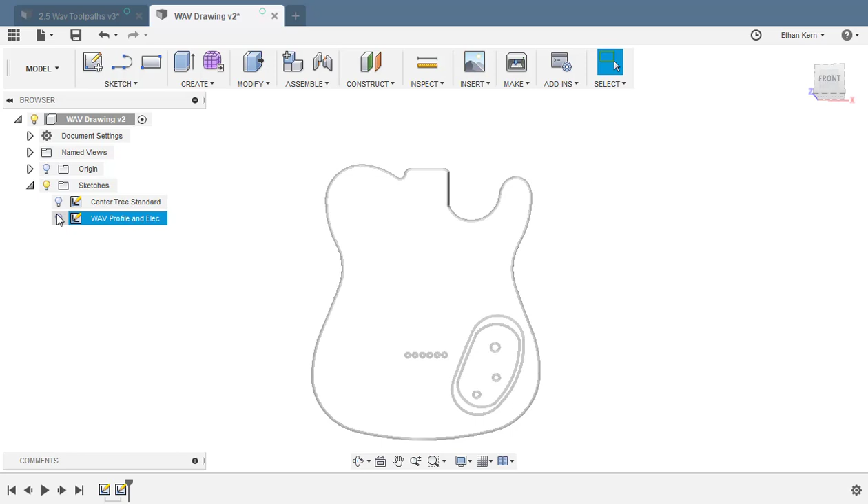I'm Ethan Kern, and in this video today I'm going to be showing you the steps that I take to create toolpaths for an electric guitar in Fusion 360. One of the first things that we need to start off with is the sketch. This is the center tree here, and it has all the critical dimensions and locations for all the pockets and drills. The next part is the profile and the electronics pocket here.

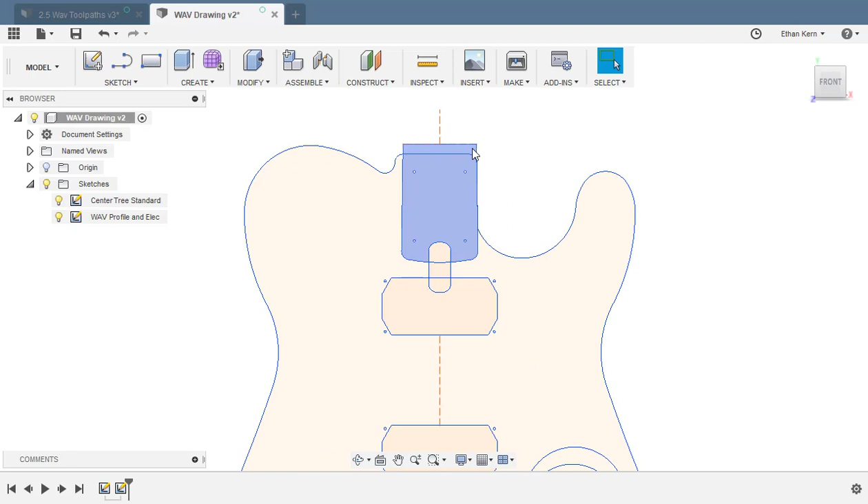There's a few things to note and a few modifications that can be made to these sketches that will allow for simpler toolpaths and a better finished product. The first being that this top edge of the neck pocket right here extend past the top of your profile by more than at least half the diameter of your cutting tool.

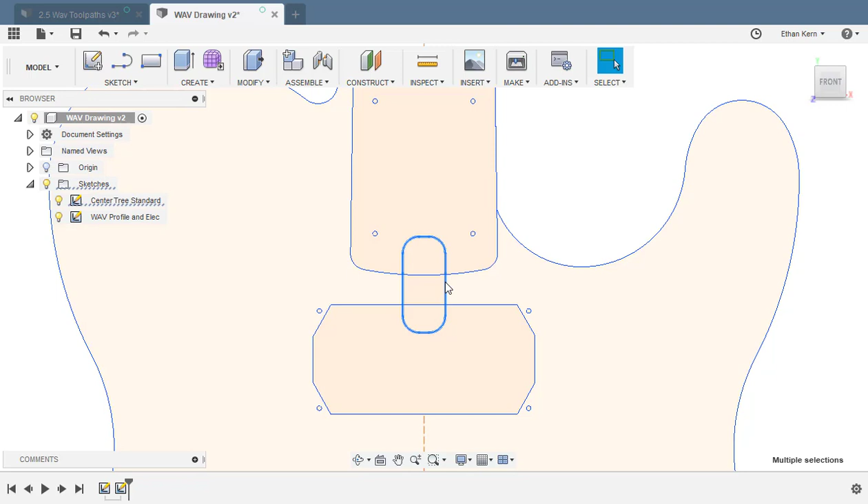The second is this access to the truss rod. By making this feature its own separate chain, we can create a single toolpath that will efficiently and effectively remove that material. The next feature we'll be focusing on is this electronics cavity.

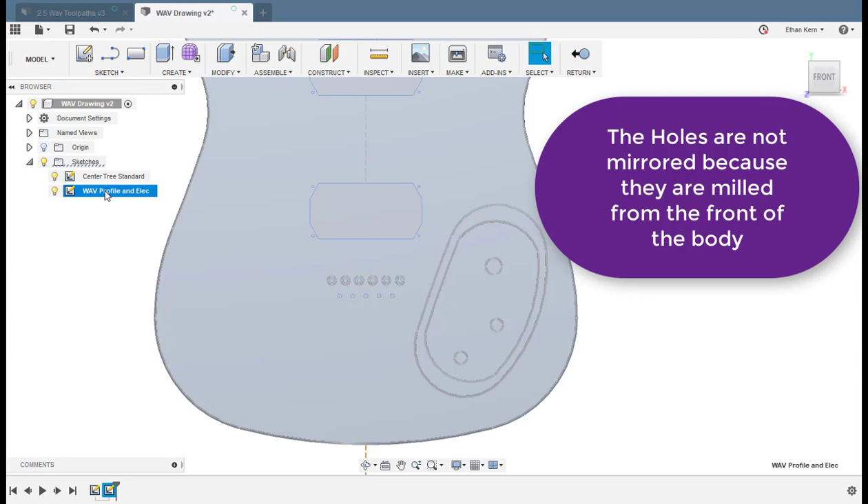These three holes are for the three-way switch and potentiometers, and then on the back is a pocket that will be machined for electronics, whereas this outside profile will be a shallow lip that will be used to hold the electronics cover. One thing we need to do to prepare this sketch is to mirror those two profiles along the center line of the guitar. And then we'll delete the original.

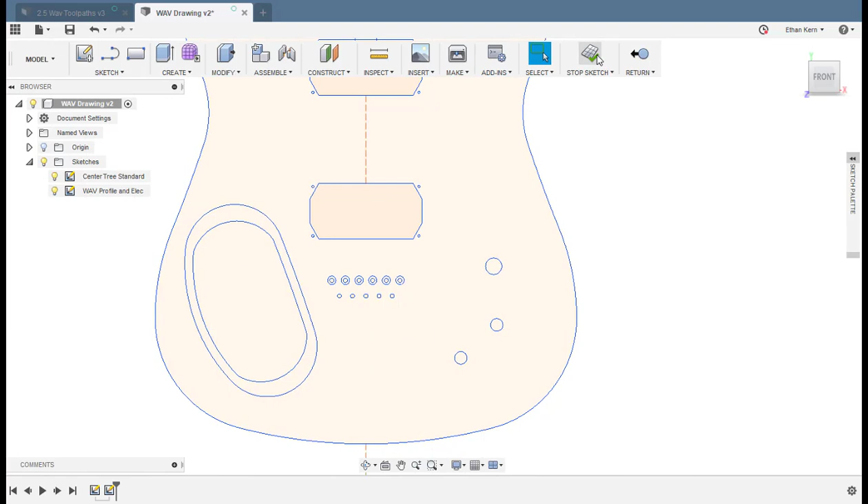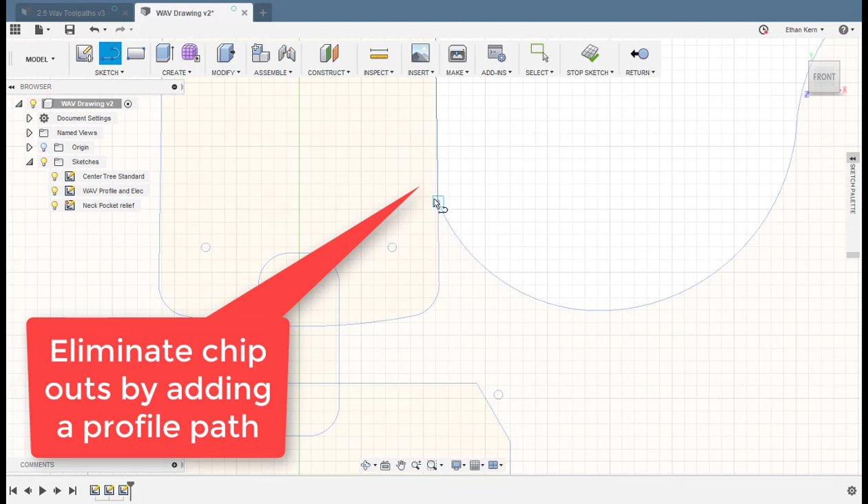We're going to exit this sketch and create a new sketch called Neck Pocket Relief. The purpose of this sketch is to add a few lines that toolpaths will be derived from. Creating these toolpaths will create a break when the profile is machined. This will greatly reduce the amount of chip out that occurs on that sharp point. Go perpendicular to the point where the profile meets the neck pocket, and then just at an angle, making sure not to touch the profile.

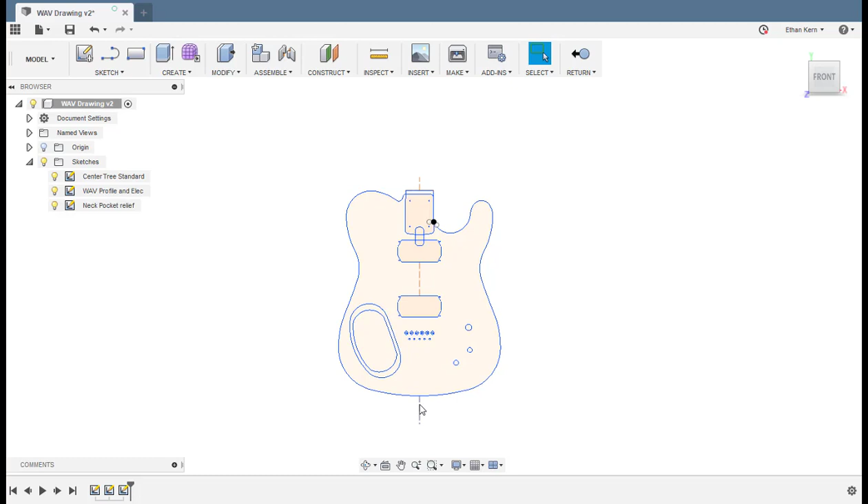Just to recap what we've done in preparing this sketch, we've made sure that the neck pocket has extended past the top of the profile. We've ensured that the truss rod access is its separate entity. We've added a relief for the neck pocket, and we've mirrored the back plate around the center line.

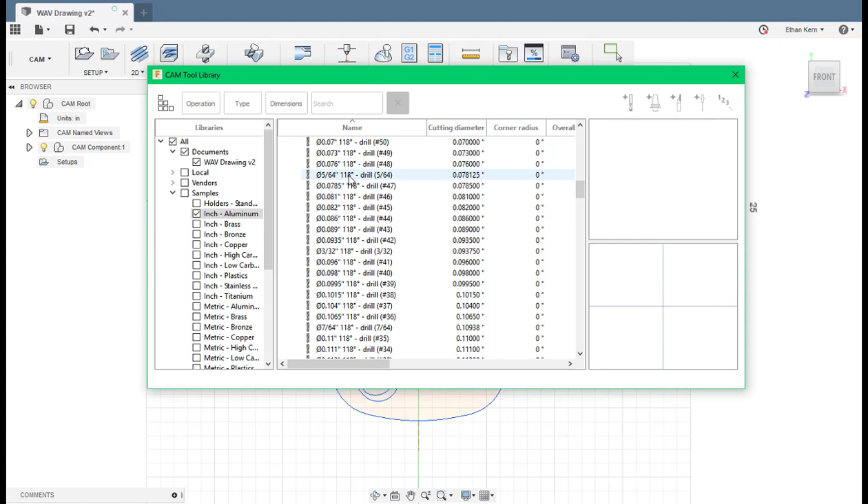We'll now begin adding tools to our library. I found that for most purposes, the sample inch aluminum feeds and speeds work very well for starting out. To add tools, we simply find the tools that we'll be using, and then click and drag, and then insert them into our drawing. We've got a 5/64 drill bit, a 3/16 drill bit. We'll be using a 1/4 inch drill, a 1/4 inch flat end mill, and also a 1/2 inch flat end mill.

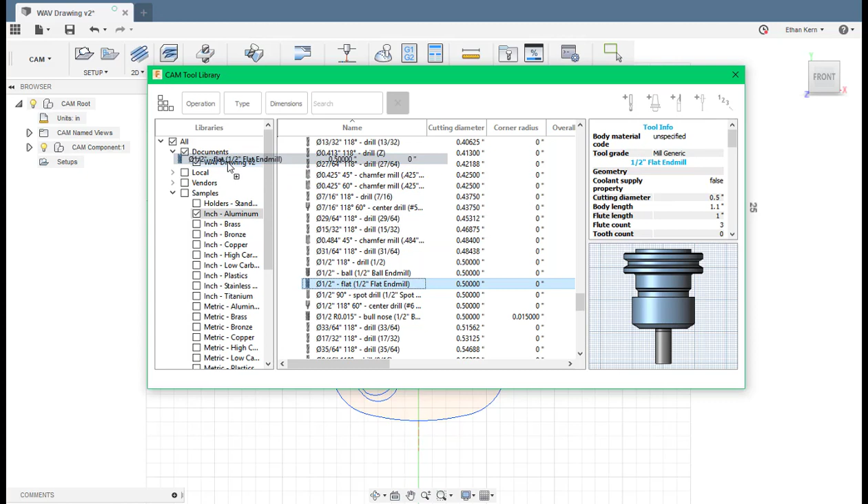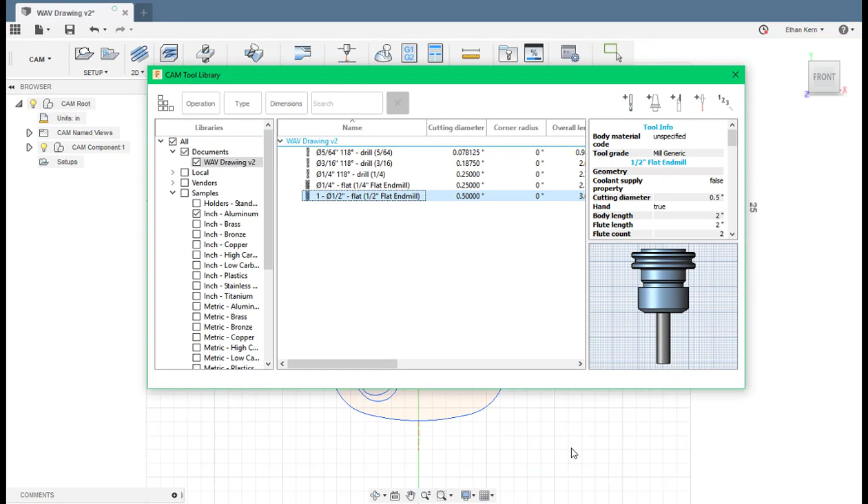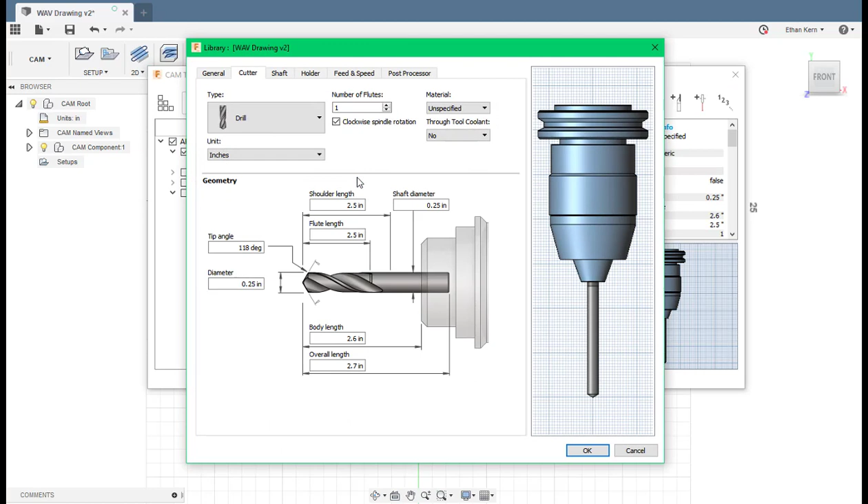We've got our tools selected. Now we're going to edit them to make sure they match the physical tools we'll be using. The flutes on this are too short, so we'll need to lengthen them to make sure that they cut deep enough. If you're using a tool changer, you're also going to want to make sure that you number the tools in accordance to where they are in the tool changer. We want to go through all the tools and make sure that they're all set up correctly. The drill bits are pretty standard. We just want to make sure that we have them numbered for our tool changer.

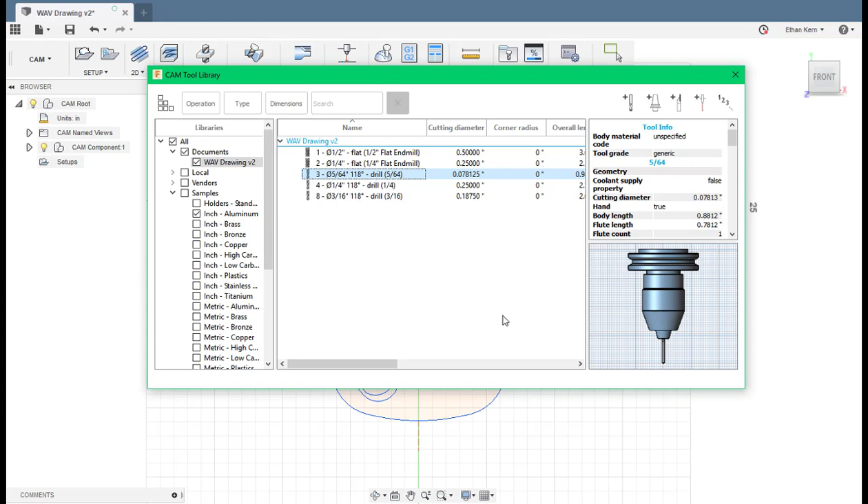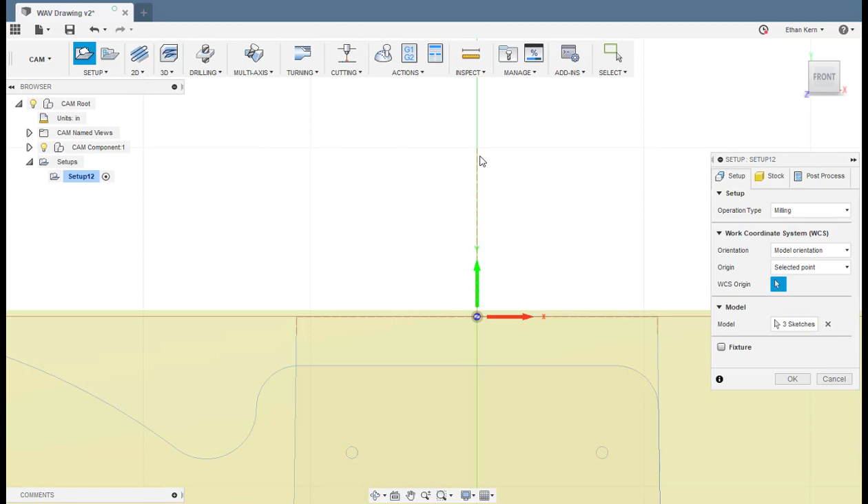With the tooling finished, we'll now create setups for the front and the back. We'll be placing the origin at the selected point. This will be the X and the Y axis 0 on your machine. Wherever you place this point in the drawing will determine where you need to zero your machine before you set up and run bodies.

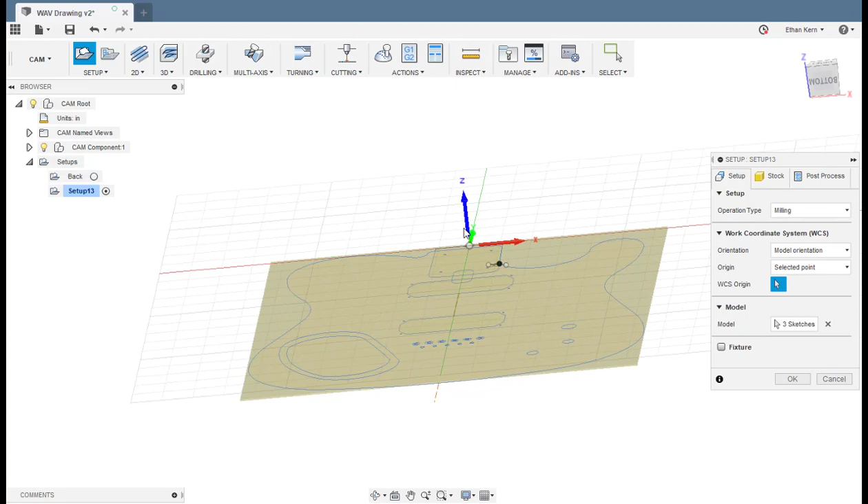We'll label this setup back and create another one for the front. We want to ensure that the selected point is at the same spot in both setups. This will be critical to the alignment when you flip the body. We'll label this setup front. Now we're going to activate the back setup and create a new folder for each tool that we're going to use on the back side.

The first one we'll label 250 drill. We'll create a new folder and then label this one 500 end mill. We'll click to activate the front and create folders for each of the tools in there. The first one being the 500 end mill. The next folder we'll create will be a 078 drill.

We'll have a 1/4 inch end mill next. And finally, we'll have a 188 drill. These folders will help keep the toolpaths organized within each setup.

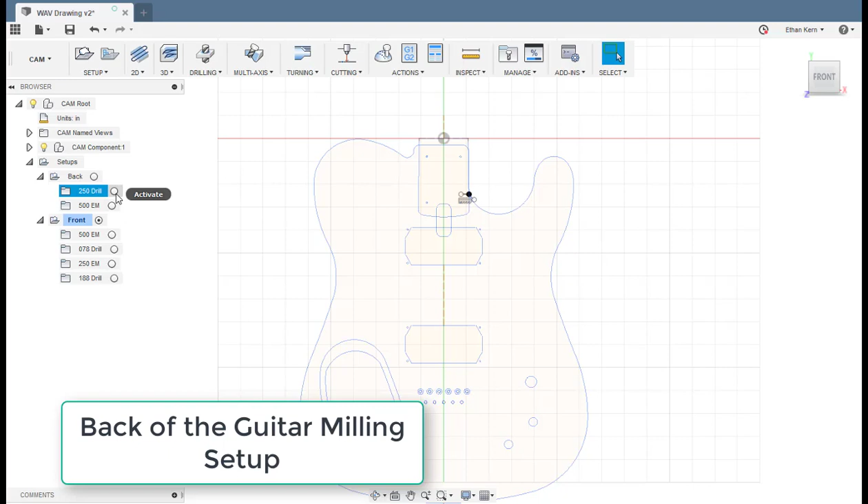We'll now activate the 1/4 inch drill folder and create a drilling toolpath. We'll select the tool and that'll pop up our tool library. We'll select the drill that we've already edited. In the geometry tab, under hole mode, we'll go to selected points and select the centers of our ferrule hole sketch.

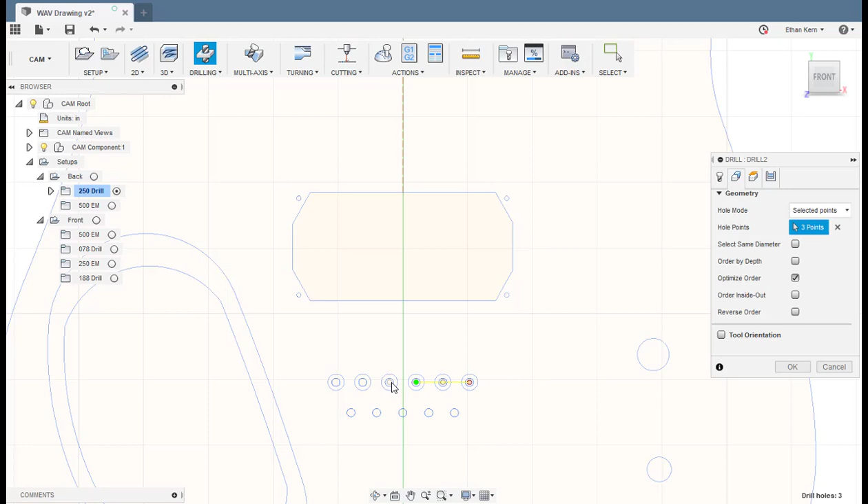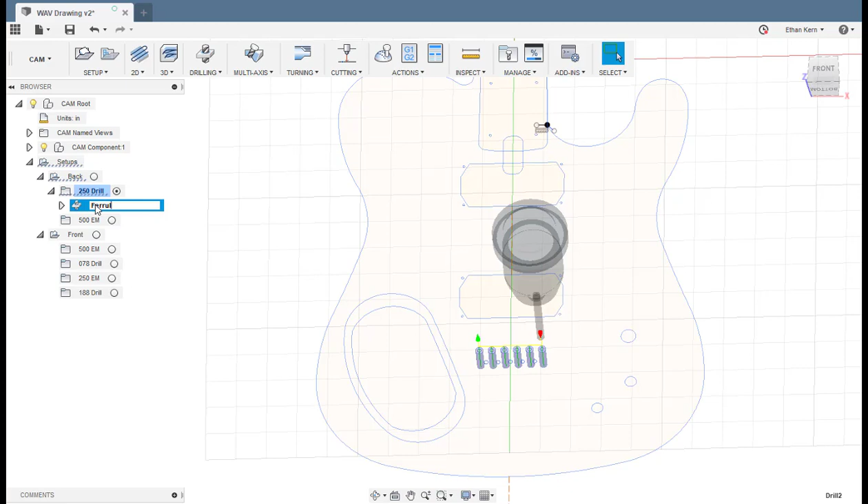From there, we'll set the height. The bottom height should be -1 inch, as that's the depth of our drills. When we hit OK, it'll calculate that toolpath and we'll be able to see the 1/4 inch holes. We'll label this as ferrule holes and then move on to the 1/2 inch end mill.

For this tool, we're going to be using a 2D pocket. Again, we'll select our tool and that'll pop up the library. We need to select the geometry, and we're going to be doing the outside lip first. We want to make sure that the arrow is pointing inward, and the part that's shaded is what will be cut. And this will go to a depth of 0.125.

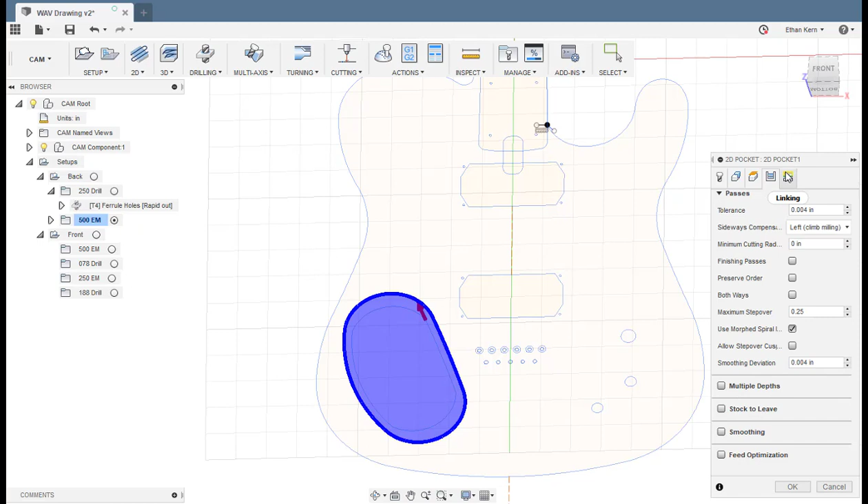We want to change the step over to about half the diameter of the tool, so since this is a 1/2 inch bit, we'll go to 1/4 inch, and we want to select use morphed spiral, and we don't want to leave any stock. When we hit OK, you can see the toolpath pop up, and we'll label it as electronic lip.

We'll now create the toolpaths for the electronics pocket. Again, we're going to select 2D pocket. Our 1/2 inch end mill is already in there with all of our feeds and speeds. We're going to go to geometry and select the internal for the pocket this time. We're shaded on the inside, so that's a good sign. We'll go to heights here, and the depth of this pocket will be -1.55 inches.

Under the passes tab, we want to change our step over to half the tool diameter again, 0.25. We're going to use the morph spiral. We don't want to leave any stock. And this time, since we're going pretty deep, we're going to use the multiple depths tab. For the step down, I'm going to set to 0.375, and I would like to use even step downs.

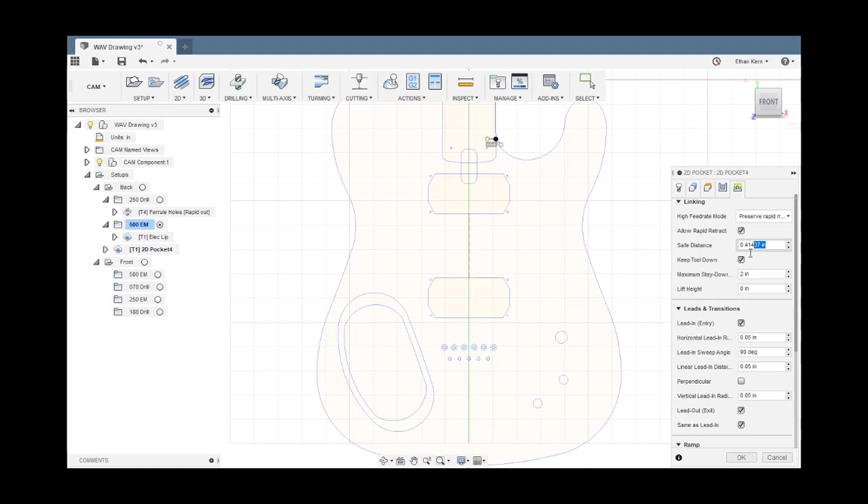And then you can see that we've generated that toolpath. And if you hold down Control, you can select multiple toolpaths. And this is all of the toolpaths for the back side of the guitar. We'll label this as electronics pocket and move on to the front.

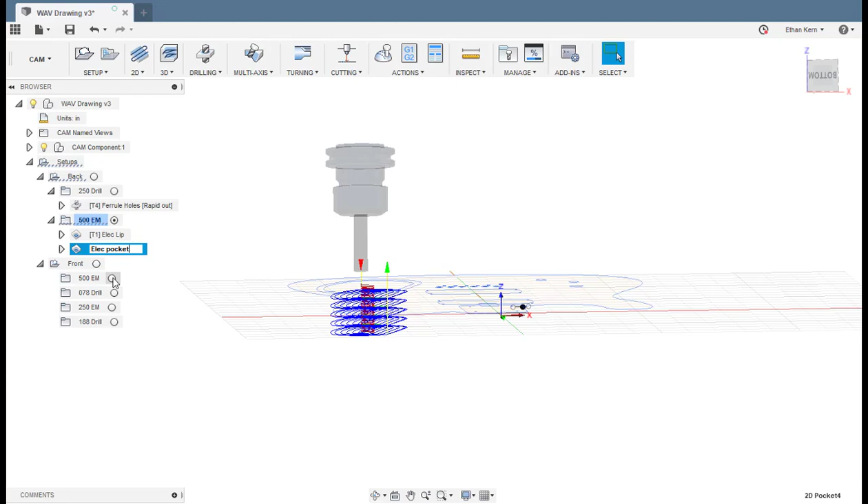We'll now move on to the 1/2 inch end mill on the front side. Again, we're going to be using the 2D pocket with our half-inch end mill. To select our geometry, we're going to choose the neck pocket. As you can see, that's shaded. The depth of this will be -0.74.

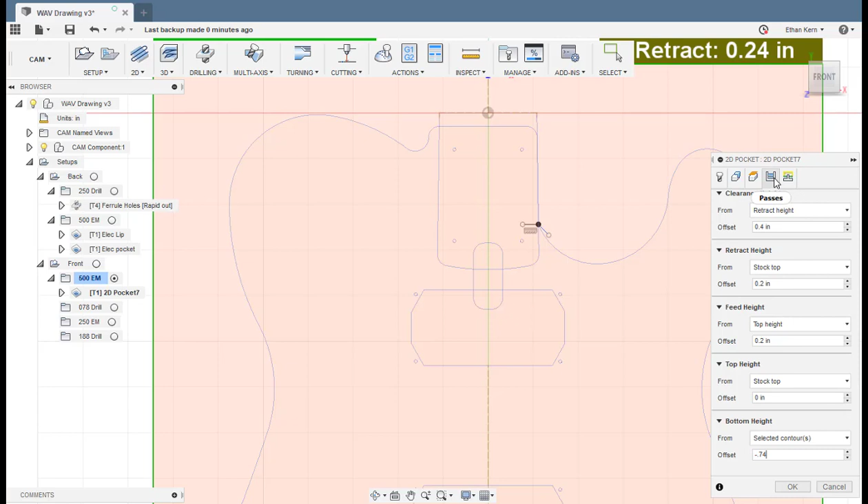As far as the passes go, we want to change our step over and don't leave any stock. We're going to use morph spiral, and we're going to do multiple depths again on this with the same 0.375. We'll label this as neck pocket.

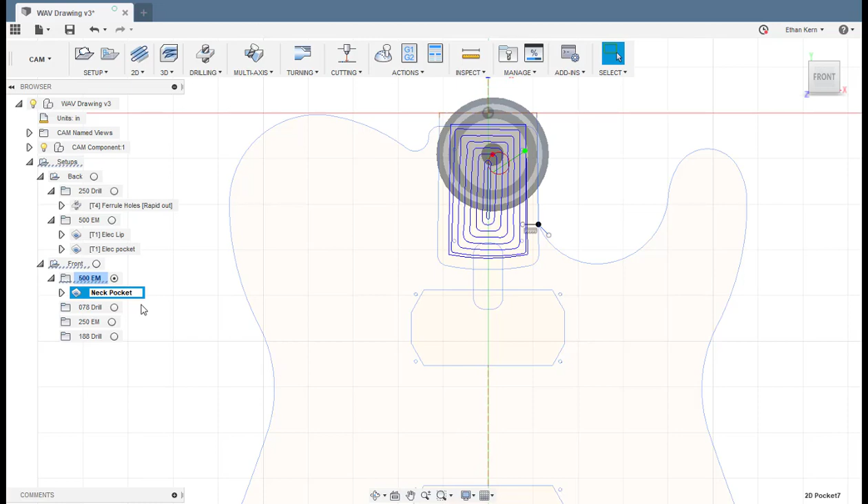And then we're going to do the same thing for the pickup pockets. So a new 2D pocket. We got our tools. We're going to select two geometries this time, and we'll click this arrow to change it to the inside, so we're actually milling out the pickup pocket. And same with that one as well. So now we've selected the inside of both of these features.

The depth of these will be 1 inch. And then the same routine with the morph spiral, step over, and stock to leave. And since these are 1 inch deep, we're going to need to set the step down as well.

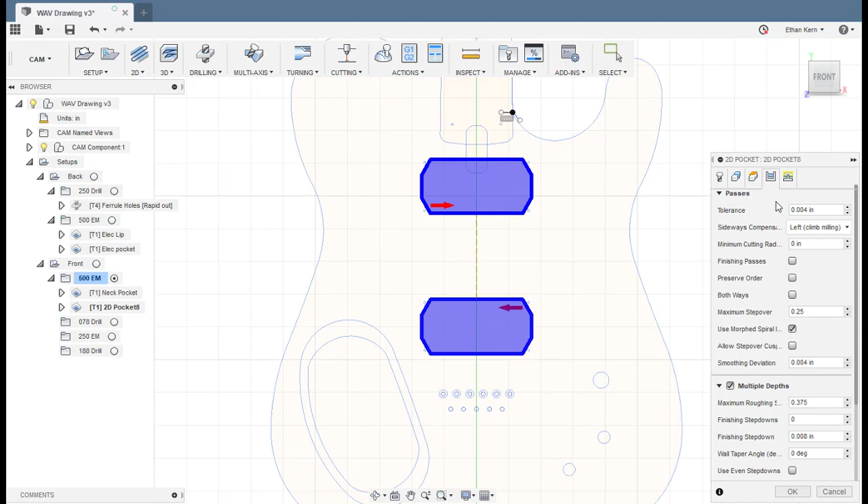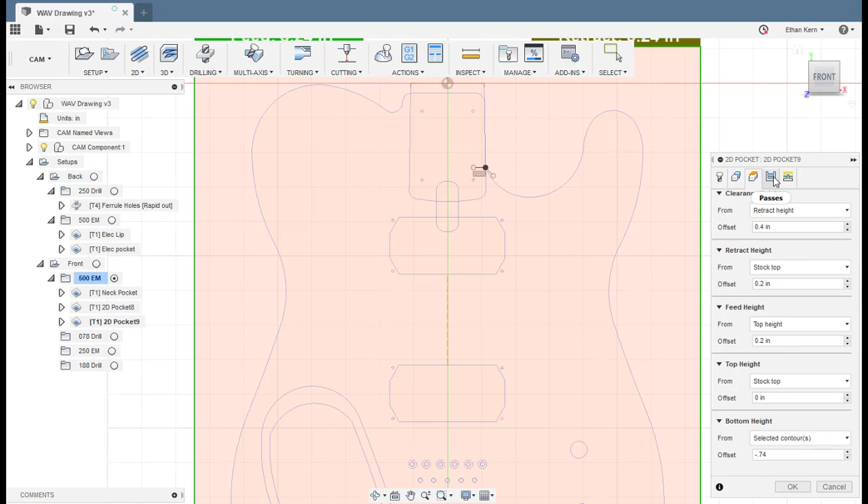And now, the last half-inch end mill on the front we're going to do is for the truss rod access. So we're going to select that as our geometry, and the height of this is going to be the same as the neck pocket, -0.74. And then we don't want to leave any stock. We'll set the step over again and morphed spiral.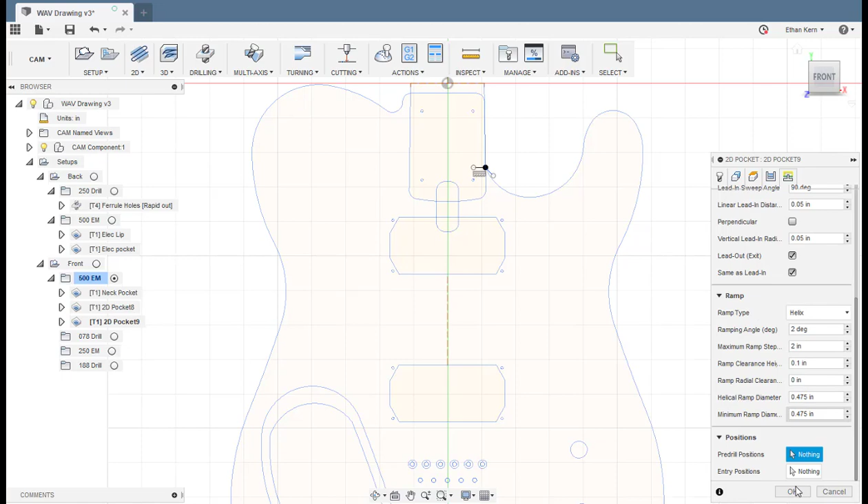But since this is so small and we're not going to do multiple depths on this, what we are going to do is come down here to the ramp and change this so it should ramp all the way down. Just like that. So it's constantly feeding down in the same motion, and this will help, since the neck pocket and pickup pockets will already be milled at this point, you will greatly reduce any chip outs while you're milling this feature out.

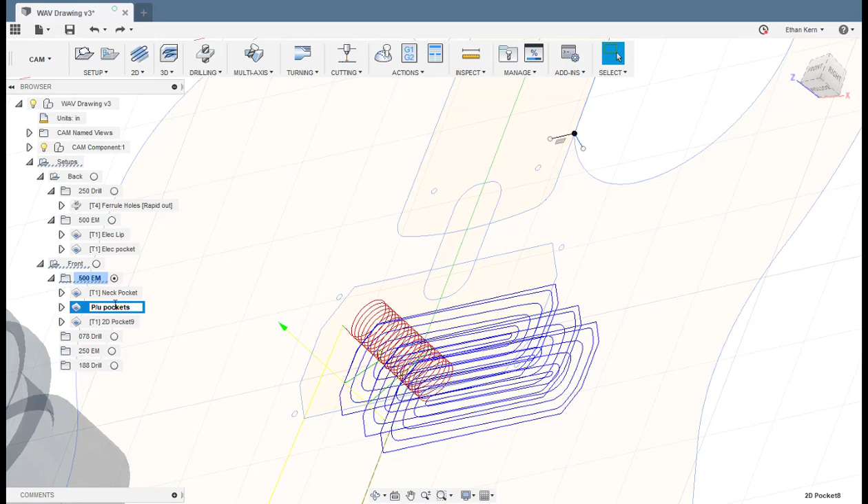We'll then label the tool paths we just made. And then we can select all of them to see all of our tool paths for the half-inch end mill on the front here. You can see how we're taking multiple depths on several of them. And it's looking good so far.

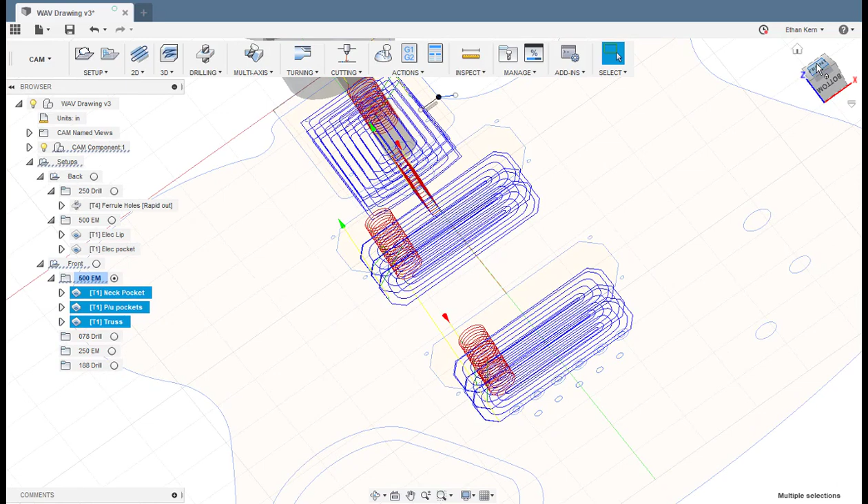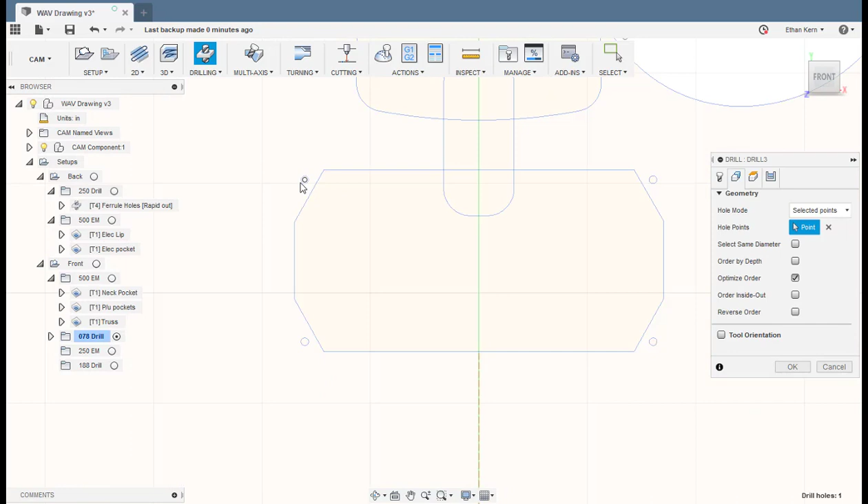Next up, we'll create drilling tool paths for our 5/64 drill. We'll be creating two different ones. Let's select our tool first, our 5/64 drill here. The first geometry we're going to select is going to be for the drills for the pickup pockets. So we'll want to select the centers of all 8 of these for both pickup pockets here. And the height of these are only going to be 1/4 inch deep.

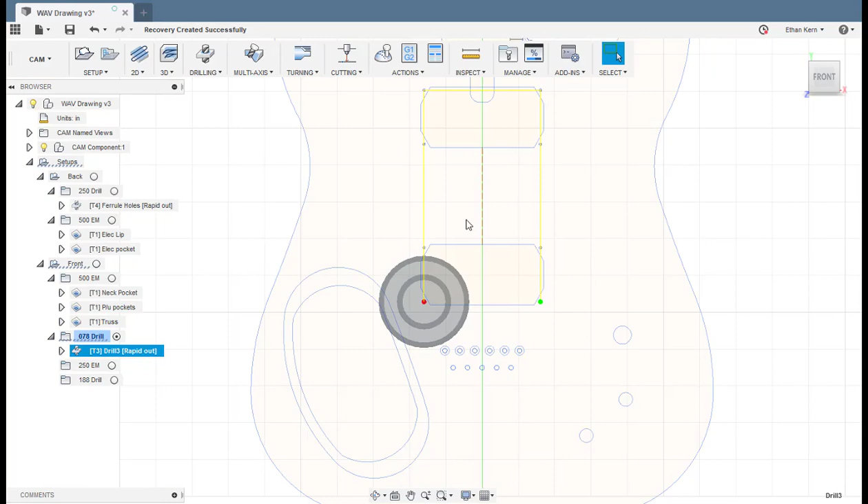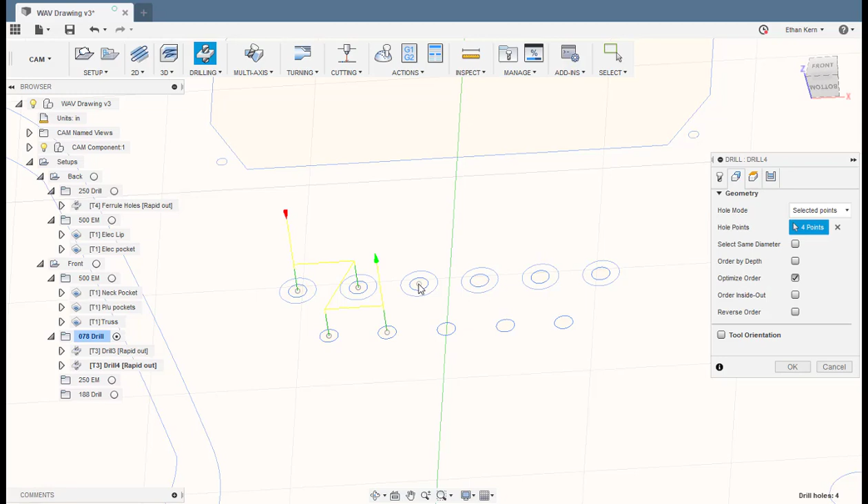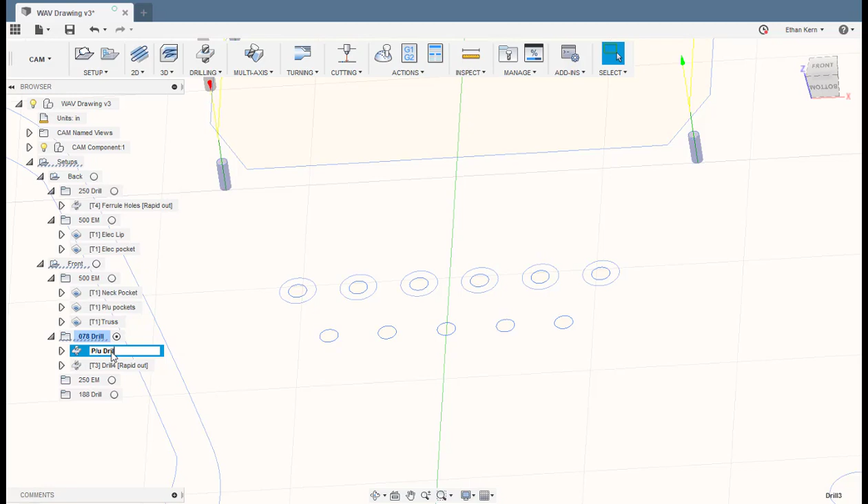Excellent. And then the next drilling tool path we're going to be using for our 5/64 will be for the bridge holes here. So we're going to go to selected points and select the centers of all of these. These are for the string holes for the strings to go through on the other side of the ferrules, as well as the bridge mounting holes. And these will go to a depth of -1 inch. We'll keep them labeled. And now you can see with all of our half-inch end mills and drills, we're on the right track.

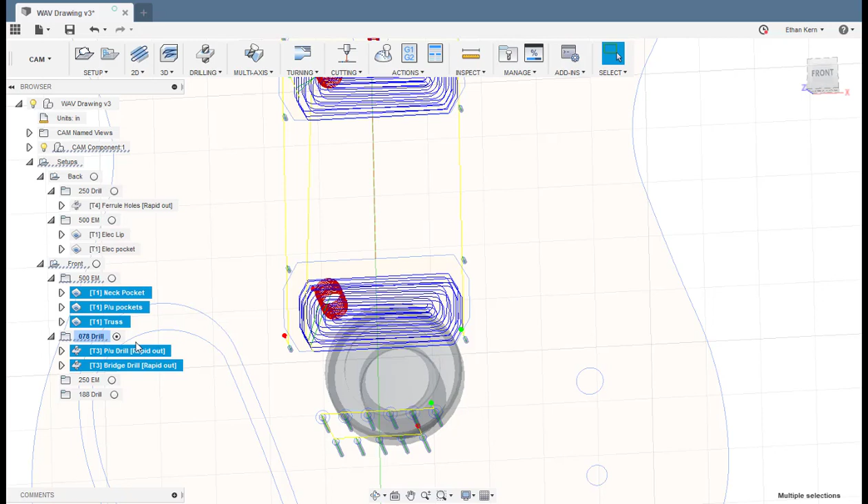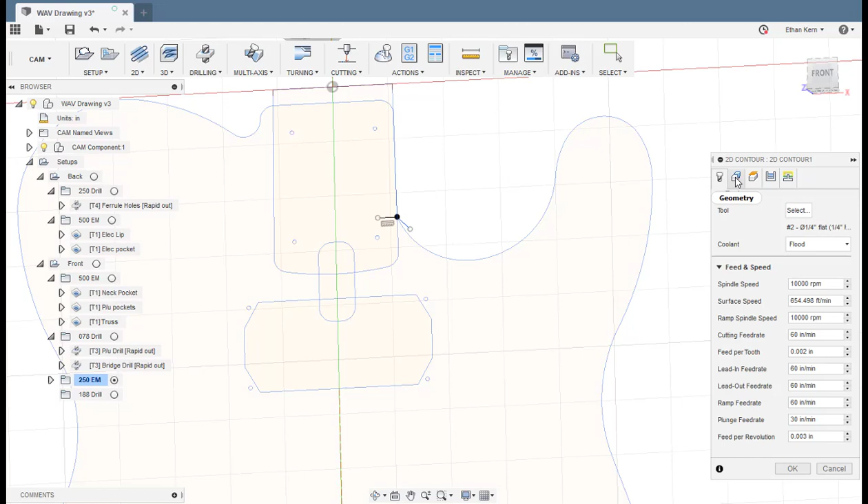For all the tool paths we've made using the half-inch end mill, we've been using the 2D pocket. Now that we're moving on to the 1/4 inch end mill, what we're going to be using now is the 2D contour. So instead of creating a pocket, it's just going to use the contour and go on the outside of that line. The first thing we're going to do is this relief that we put in the sketch earlier. So we'll select our 1/4 inch tool, and under geometry we're going to select both of these lines here.

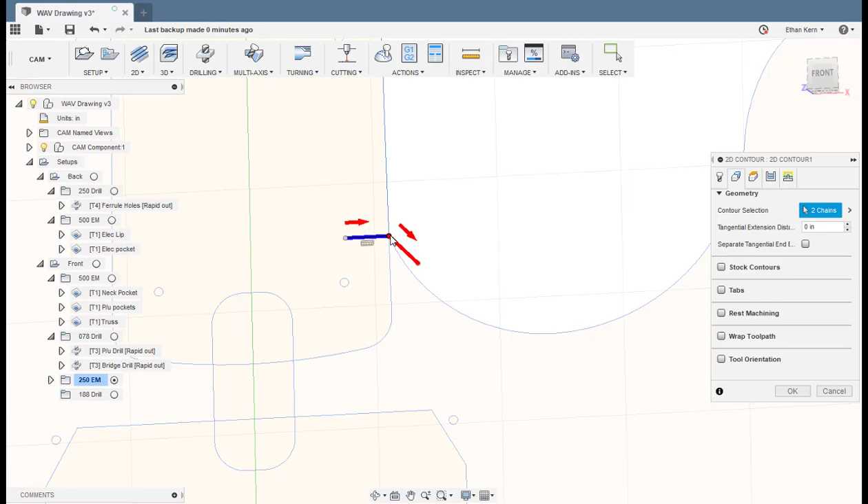And we want to make sure that the arrow is on the outside of that line, because we want it to create a break, so when it comes and does the profile, with this tool spinning clockwise, it will have a tendency to pull and chip out that sharp point right there. So by creating this toolpath here at the same depth of the neck pocket itself, on the passes we're going to create multiple depths, and we're going to do a very, very small step down, so there's less of a chance of this 1/4 inch tool chipping out that. And we'll create even step downs as well, and we'll click OK.

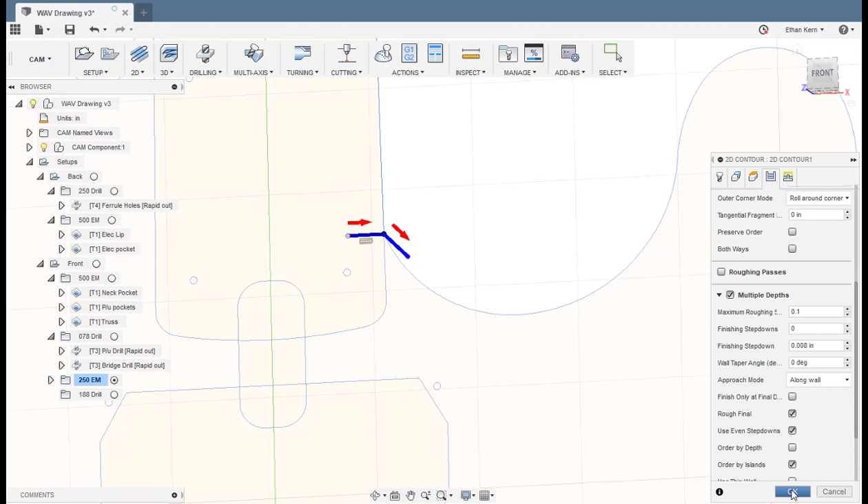Calculate this toolpath. So you can see there's a lot of passes on that, and so when we put this on the neck pocket, you can see how it ends up at the same depth as well, and this will help prevent chipping out. We'll name this neck relief.

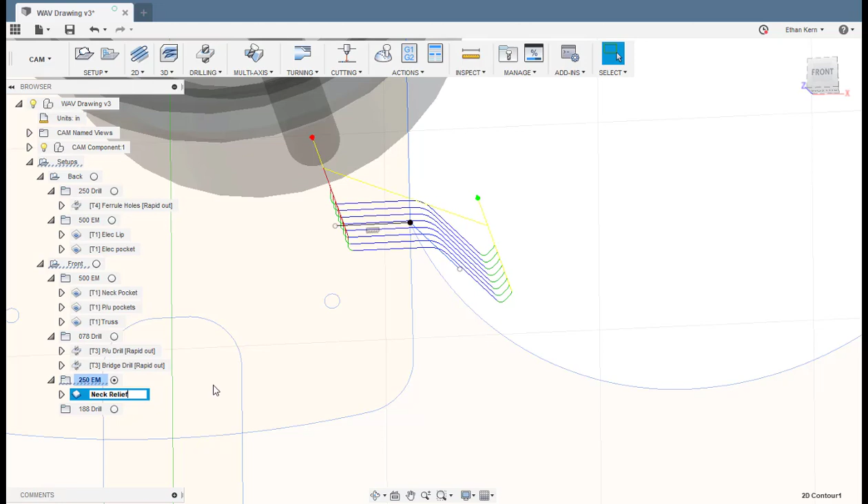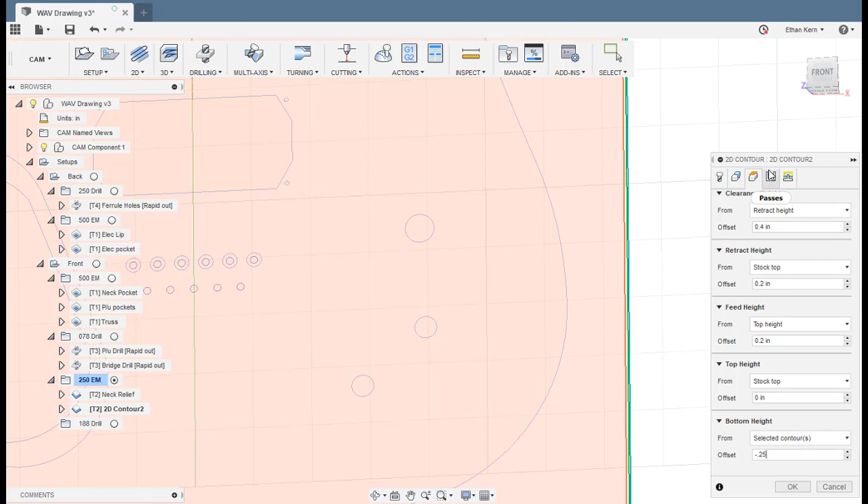And then for the next 1/4 inch toolpath, we're going to be milling out the electronic holes here. And we're going to use the same 2D contour with our 1/4 inch tool here. We're going to select all three of these for our contours. And then the depth of this only needs to be -0.25, since we've milled out the back already. The electronics pocket at this point will already be milled out, since we do the back before the front. It's not that deep, so we don't need to do multiple passes, and so you can just calculate this from right here.

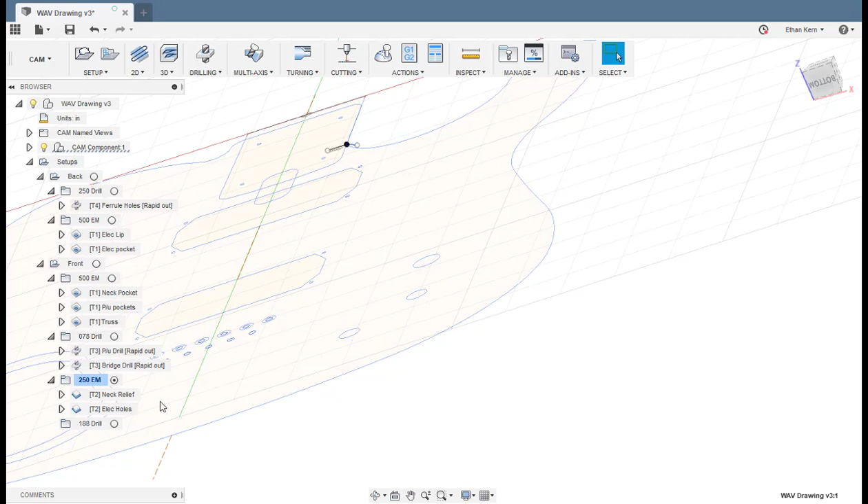Label it electronic holes. And then the last toolpath we need to create with our 1/4 inch tool, again, will also be a 2D contour, and this will be for the profile. So for the geometry, we'll select the whole profile of the guitar, making sure that the arrow is on the outside, so we're cutting on the outside of our profile in the sketch. The height will be, so our blank thickness is 1.75, but we want to go a little bit below that to make sure that we cut all the way through.

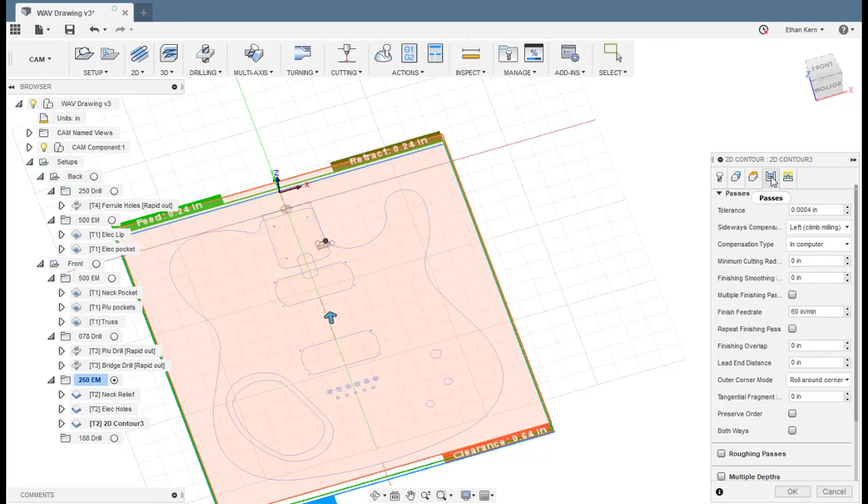In the passes, we'll need to create multiple depths. With the 1/4 inch tool, about a 1/4 inch depth will work just fine. Now, if you're not using a vacuum table to hold your part down and you're just bolting it down, we're going to need to go back to the geometry tab and create some tabs to hold the guitar body into the frame as it's being cut out.

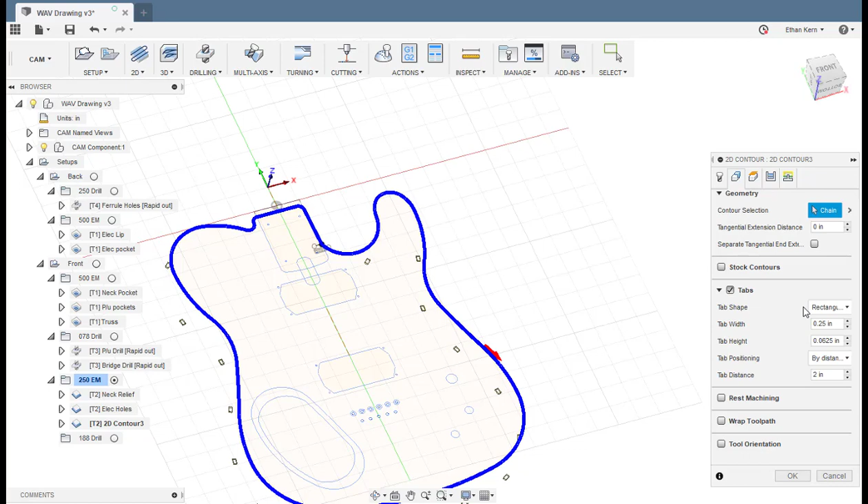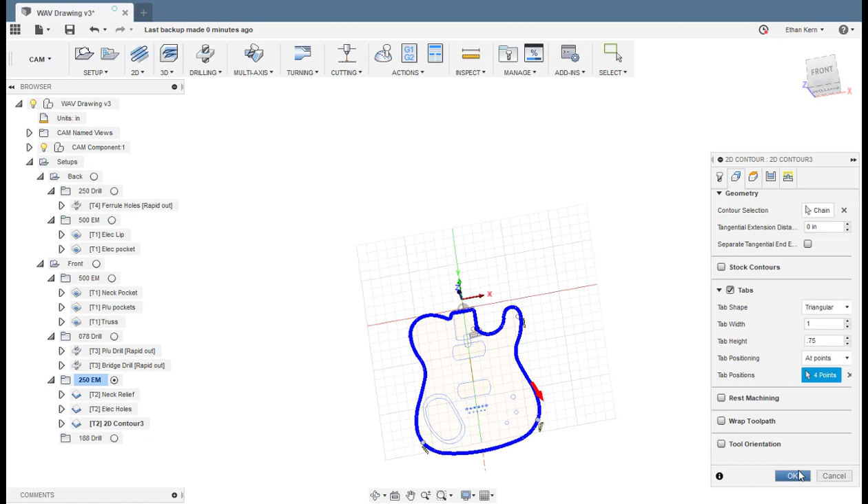We'll change these to triangular, make them 1 inch wide by 0.75 tall, and we want to go to at points. We only need about 4 or 5 of them to really hold it down. So we'll select along the edges here. You want to put these in places that are easily sandable to remove them quickly afterwards. And after that, we can calculate. So as you can see, we've got tabs to hold it in, and we are almost finished with the front of the body.

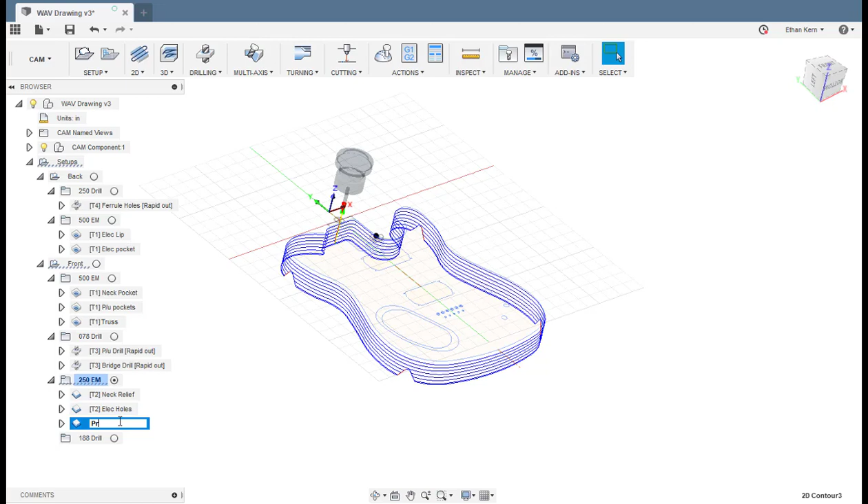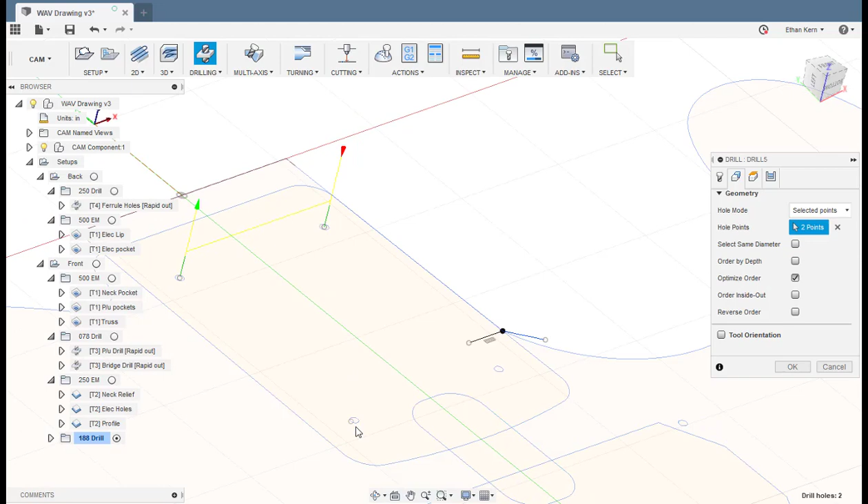We'll rename this to profile, and the last toolpath we're going to make is the 3/16 drill. So we'll select our drilling toolpath and our 3/16 drill, and this will be for the neck mounting holes. Holes that will connect the body to the neck. So we'll select all 4 of those, and the height is going to be -1.78, and we want this to go all the way through the body. We want to make sure that it clears the blank. So we'll select the drill tip through bottom and calculate that out.

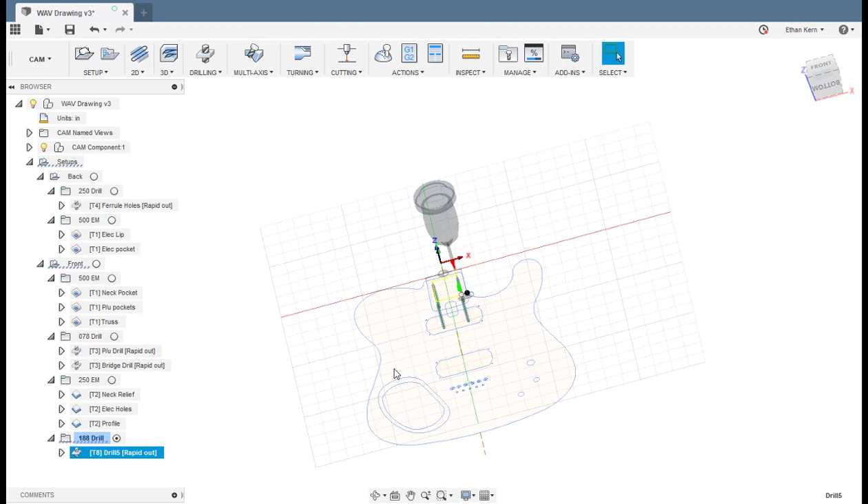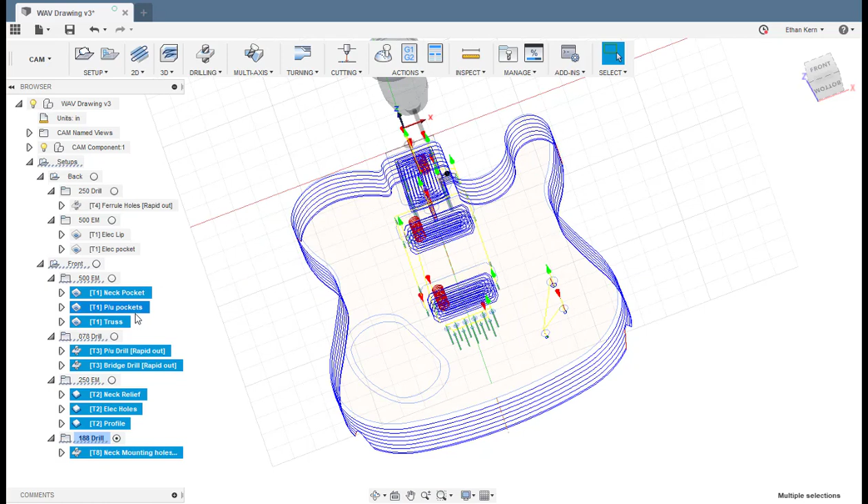And now we have successfully calculated toolpaths for an entire electric guitar. The next section will be on post-processing. Now that we've created all the toolpaths, we need to turn it into code that the machine can understand. We'll start on the back. If you have an automatic tool changer, you can select the whole setup for the back. If not, you'll have to repeat this process for each folder for every tool. We'll start with the back.

If we right-click and go to post-process, it'll pull up this post-process window. From there, you need to go through and right here select. Each machine has a different control, and there's a lot of post-processors for a lot of machines. In this case, we use the Centroid control, so we'll select the Centroid post-processor. If we hit post, it will ask us the location of where this will go, and we'll select this on the desktop. We'll name this back guitar. Save. And then this will pop up all the G code that is created from the whole back setup.

Now that you have this code, it's almost ready to be put on your machine and ran. Before you do that though, you want to compare it to another piece of code that's already been ran on your machine and proven, just to make sure that it looks very similar. Also, while you're running any code for the first time, you always want to have your hand on the emergency stop, just in case something happens unexpected.

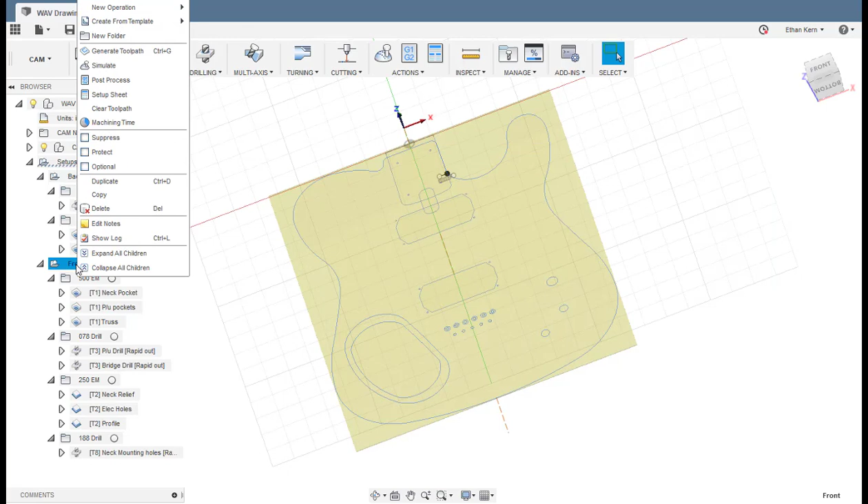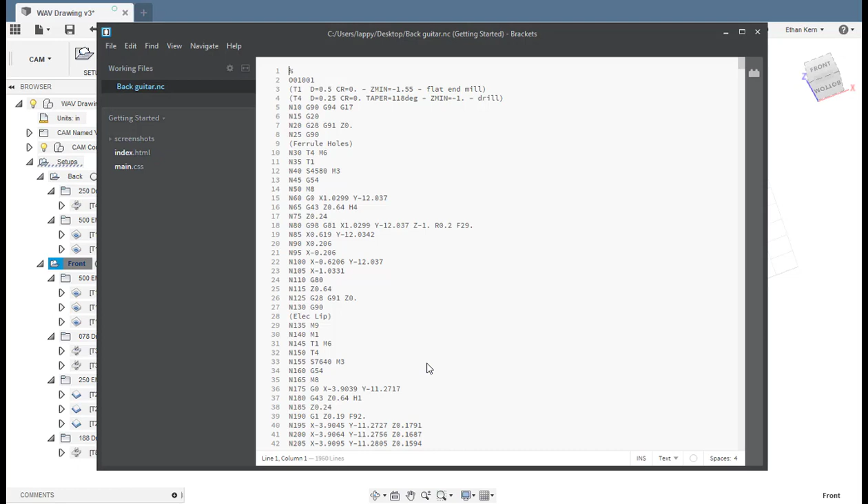Now with the back done, we're going to follow the same process through to the front. Or if you don't have an automatic tool changer, you will need to do each tool individually in the same manner. We still have Centroid up here, and so we can go ahead and post it. We're going to post it to the desktop, and we're going to name this one guitar. And as you can see here, it lists all the tools that I'll be using and the maximum depth for those tools. And if everything looks good, you're ready to run it. And with that, I'm going to leave you with a brief summary of important things to always keep in consideration.